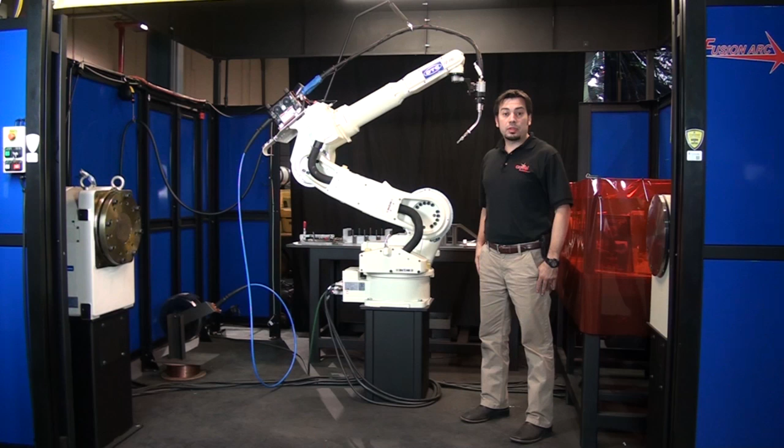Hello, I'm Bryan with Capital Robotics. What I'm standing inside today is a fusion arc weld cell that we can provide to you to reduce your weld costs. I wanted to go over a weld audit, which we call a weld cost analysis, that shows a return on investment. Let's go ahead and open the weld cost analysis.

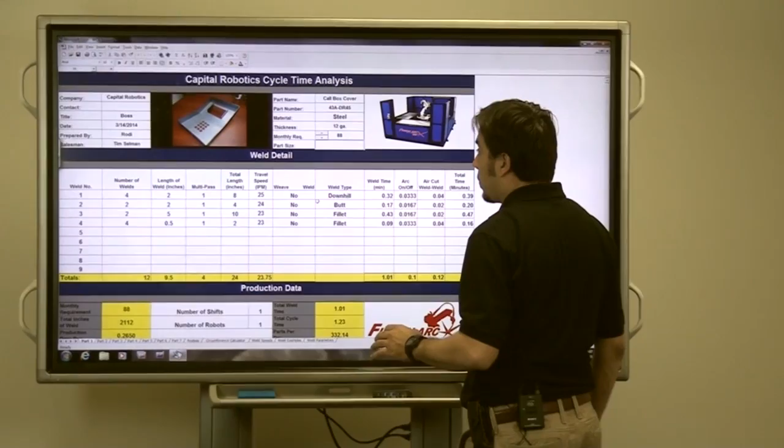So there's a couple different things for criteria we need here: what type of material are we going to be welding—steel, stainless, or aluminum—material thickness, different gauges, different thicknesses, plate, and then a monthly quantity.

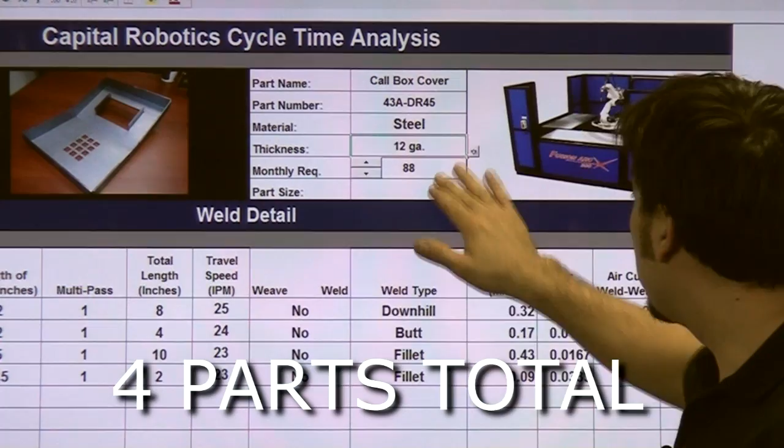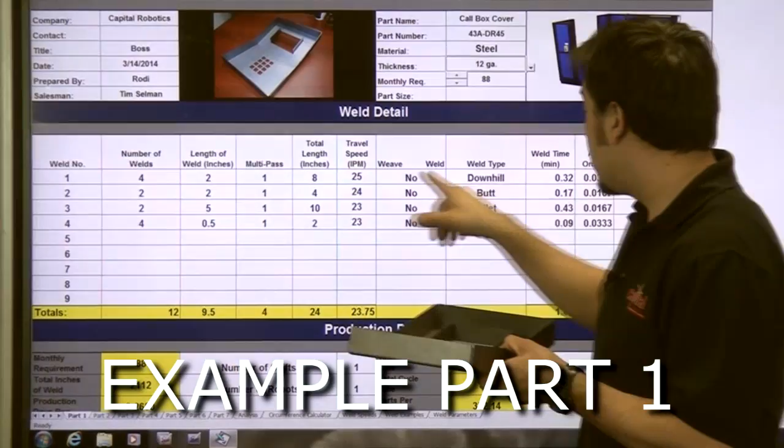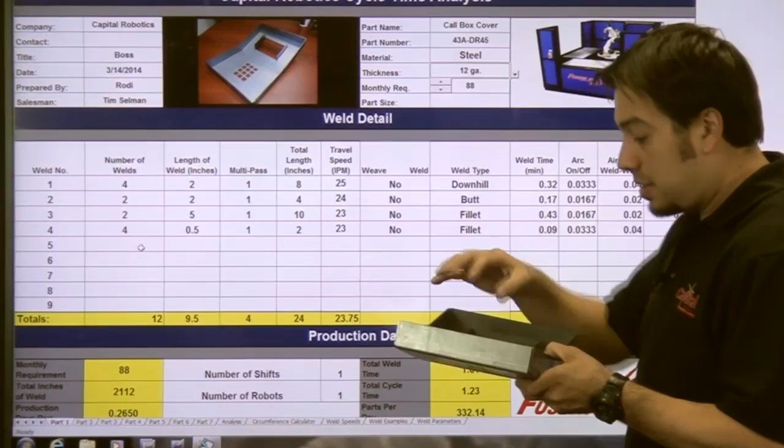So in this case, based upon the part we're showing here, we have a couple different welds with different measurements. We've got 4 vertical welds, 2 inches, as you can see, downhill—we're not going to be weaving it. 2 2-inch welds on the sides, these are butt welds illustrated here. 2 5-inch welds, which are fillets, on these tabs on the inside. And then 4 half-inch fillets on the inside of this portion here.

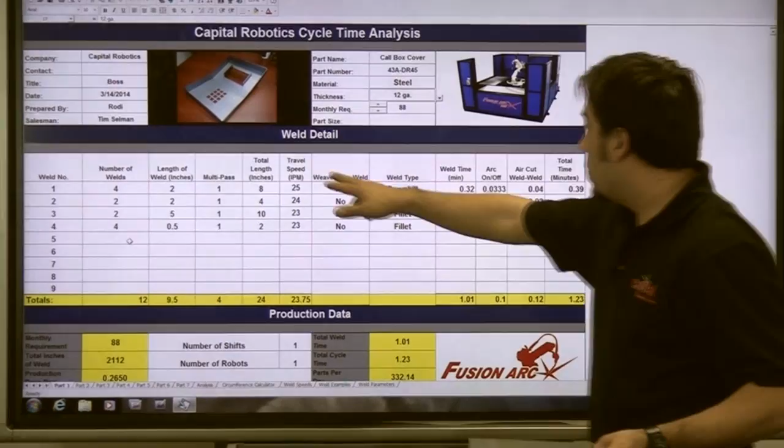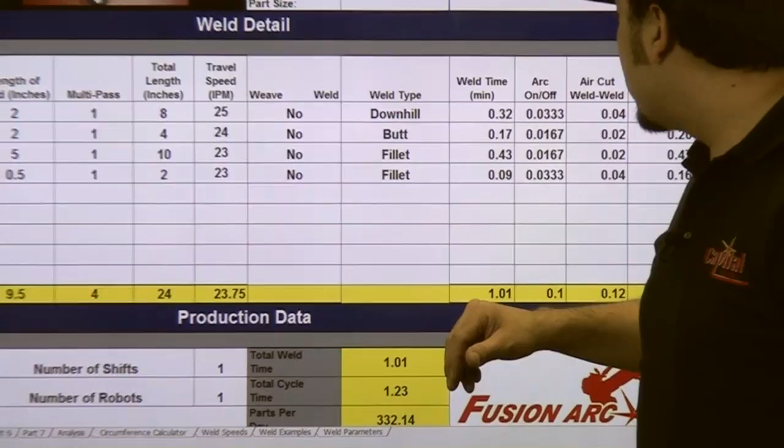So basically what it's showing is to do all that with the travel speed listed, it's going to be right over a minute of weld time, and the total cycle time is going to be about 1.25 minutes, so about 1 minute 15 seconds. So to do my quantity of 88 times per month, it's about 2,100 inches of weld. It's going to be about a quarter day to do that production.

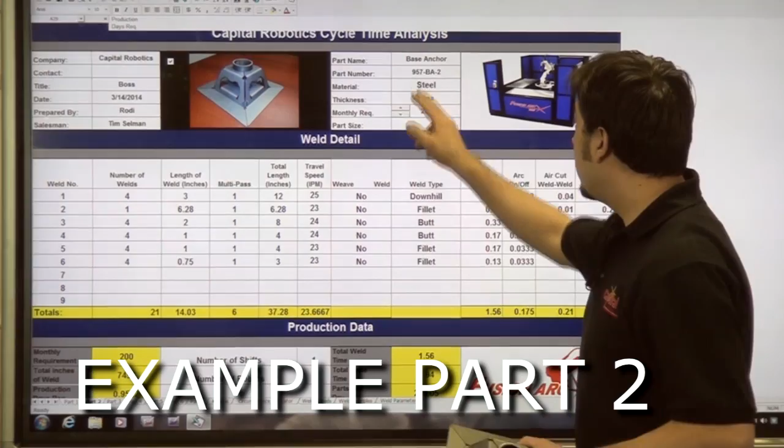So the next part we labeled the base anchor. Again, it's a steel part, 12 gauge. We're doing about 200 a month, which is only about 50 parts a week. In this part, we have 4 3-inch welds, and so on, 1 diameter, 2-inch diameter on top. Showing the weld speeds again, we're not weaving, and the different weld types as well.

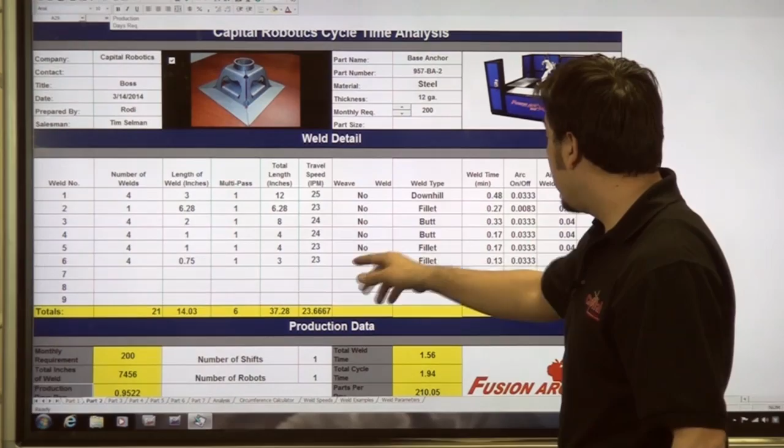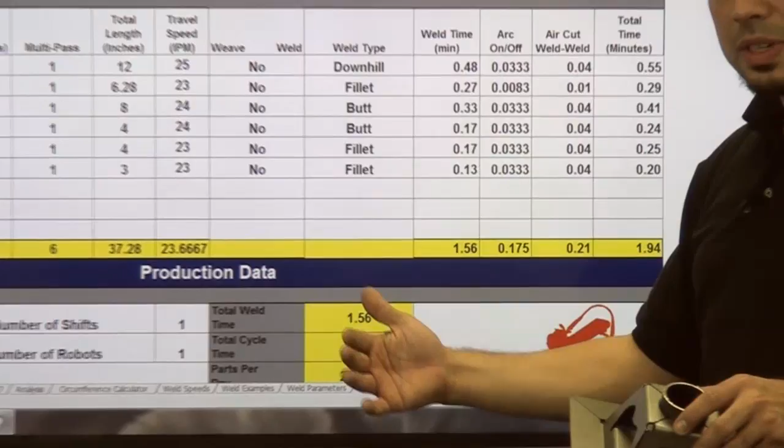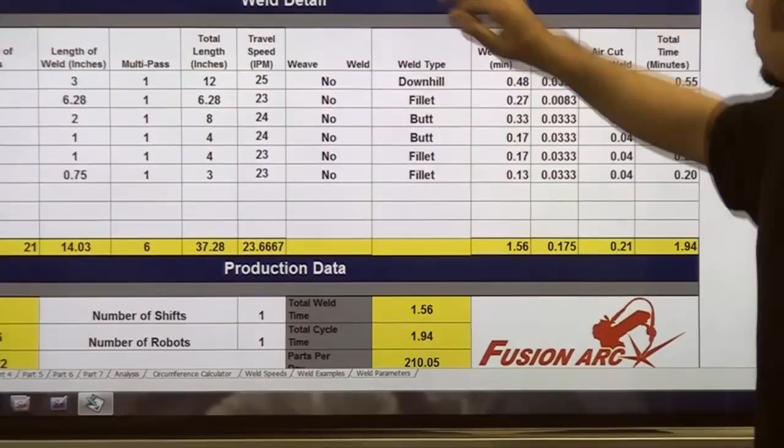Downhill fillet, butt welds. So to perform this part in the automated robotic process, it can be about 1.5 minutes of total weld time. But again, using cycle time analysis, it's going to calculate right under 2 minutes of movement—we're actually calculating the time from start to stop, the movement from starting to the next weld as well. So to do the monthly requirement of 200 a month, approximately 7,500 inches of weld, it can be about a day's worth of work. So a full month's production in 1 day.

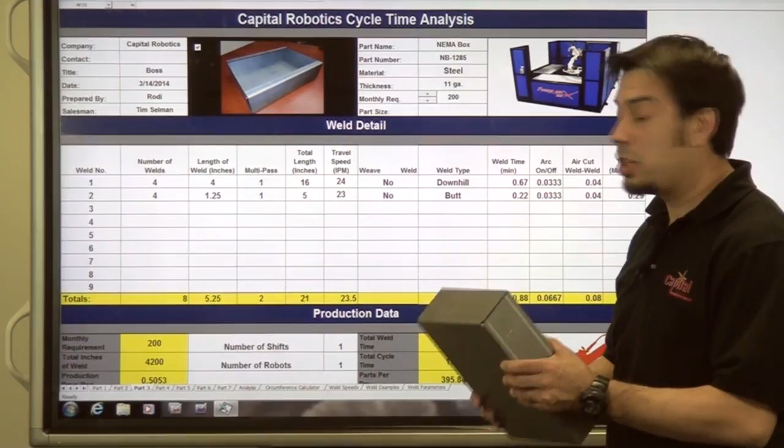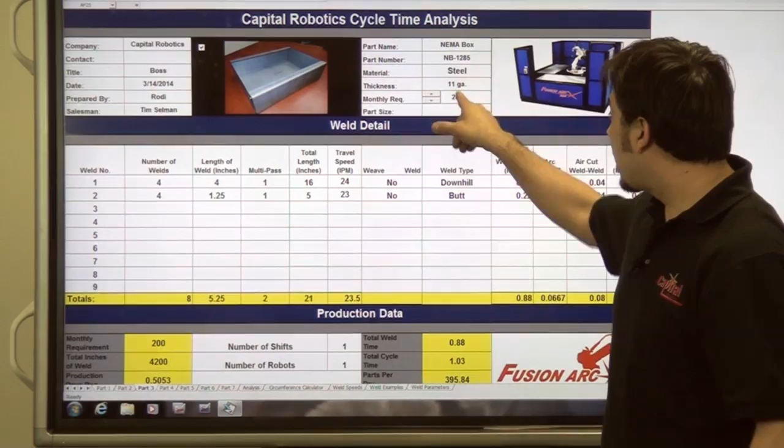That's powerful. So the third part we have is the NEMA box enclosure. A lot of our customers have different style boxes, fuel tanks, what have you. For construction of this, again we're looking at steel—in this case 11 gauge, a little bit heavier—200 a month. Basically we have 4 4-inch welds and 4 1.25-inch welds. So even though you'd think this doesn't have a whole lot of linear inches of weld, by the time you calculate 200 a month, it's about 4,200 inches of weld. So again, to do the monthly requirement here, we're looking at a half day of production.

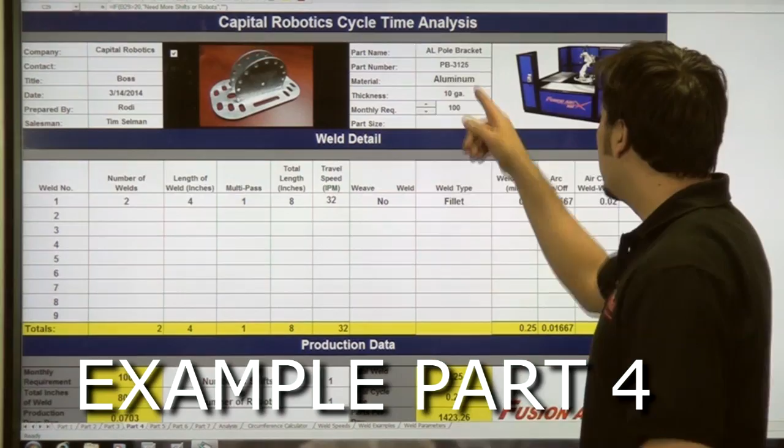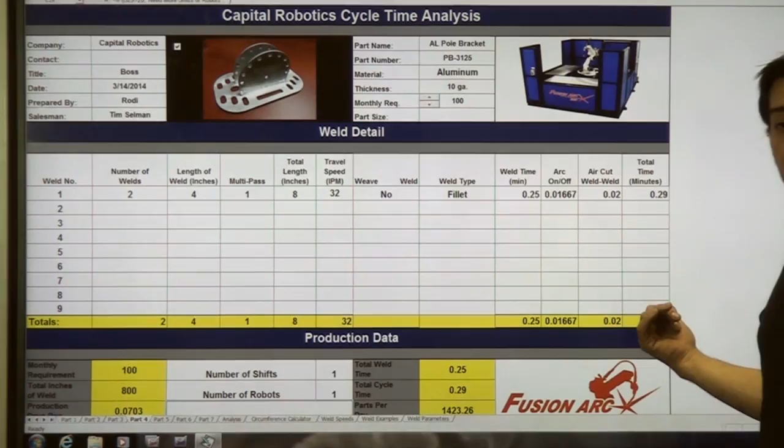So the last part of the analysis is the aluminum pole bracket, 1/8 inch thick aluminum material, doing about 100 a month, again about 25 a week. And again, not many welds on it, but still 2 4-inch welds. We're not weaving, fillet—it's going to be about 1/3 of a minute, so you're looking at right at 20 seconds. So to do 100 a month, it can be just under a couple hours to do that part.

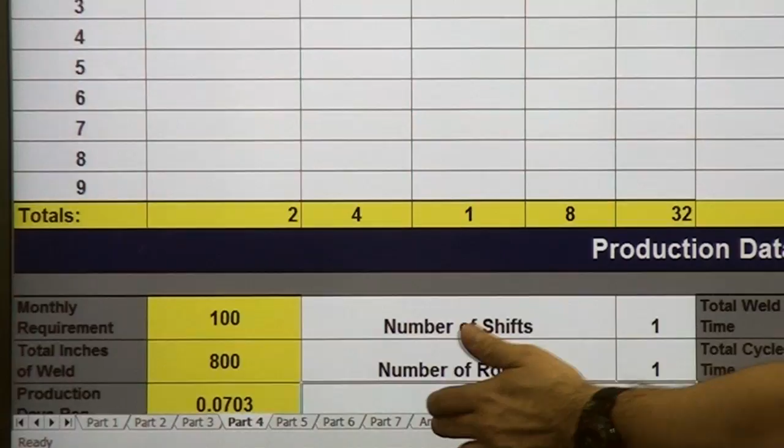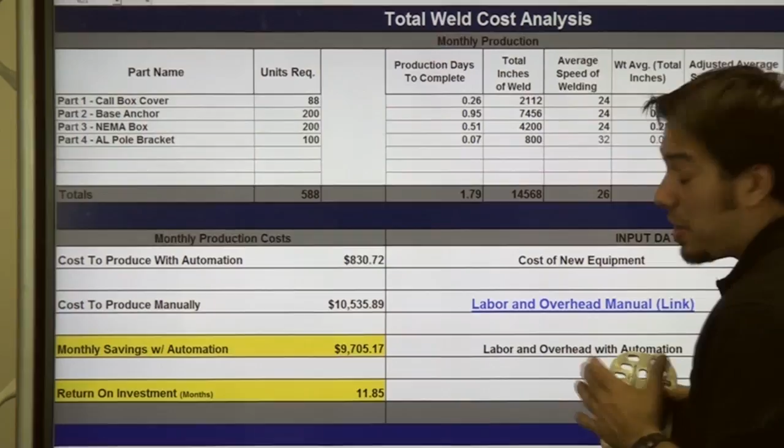So if we go now to the analysis tab, this is kind of where we can calculate the total number of parts and everything, units required. So although we only had very lower volumes for lot sizes, it's a number right under 600 parts a month. Production days to complete, under 2 days to complete it. Total inches of weld, you're right at 15,000 inches of weld.

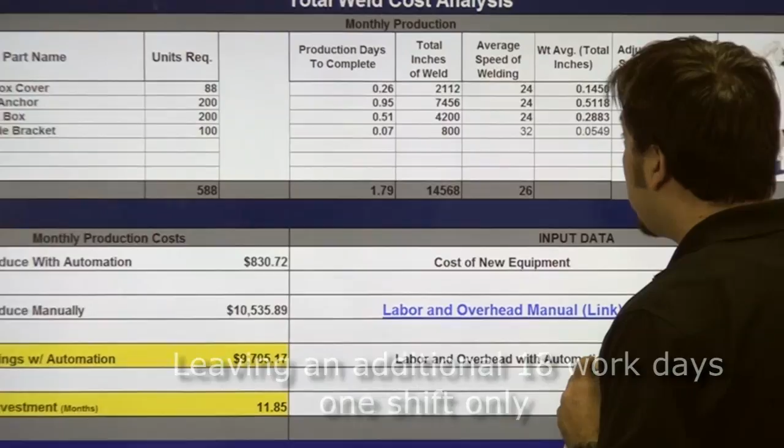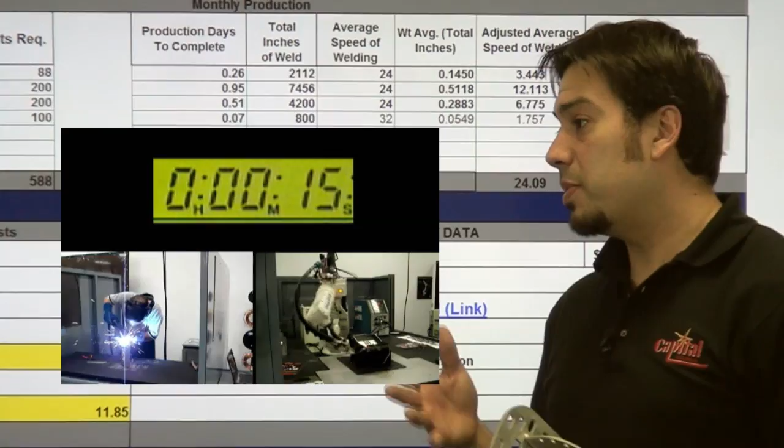So the way this spreadsheet calculates everything is based upon human efficiency and human speed of welding versus automated efficiency and automated speed of welding. So on the automated side, we're going to be about 80% efficient. That means out of a 10-hour shift, you're welding about 8 hours a day if you can feed the machine correctly. The human's going to be around 20%, 22% efficient. It's not that anybody's lazy—that's saying from moving from part to part, lifting up the hood, taking breaks, using the restroom, what have you.

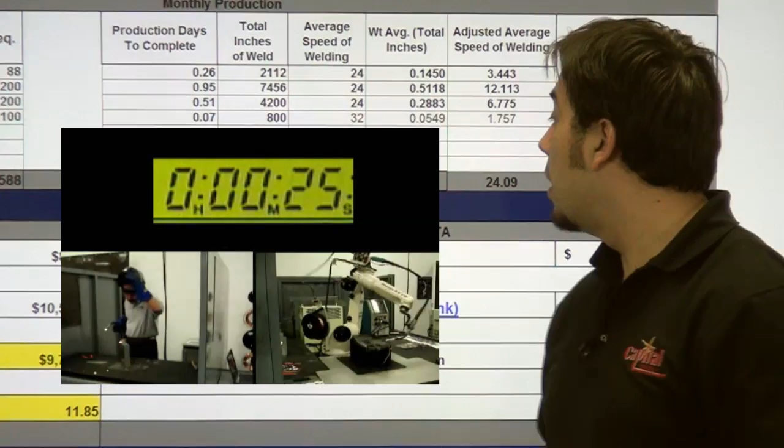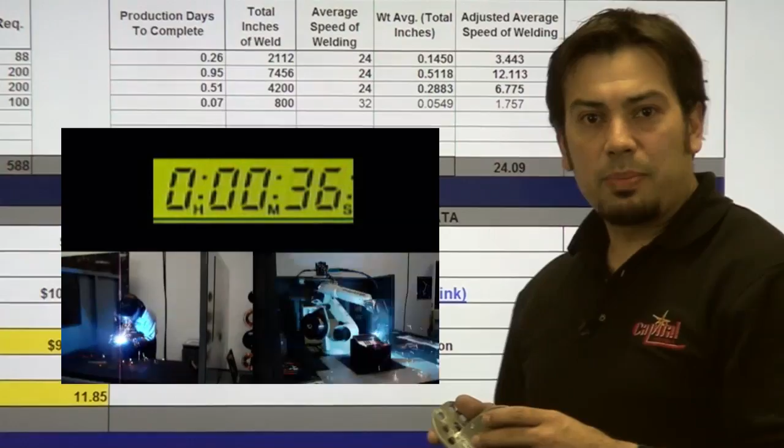So my average speed of welding can be about 26 in this case. This customer was TIG welding this part, so you're going to be running about 8 inches a minute on that part, and then on the MIG process about 8 to 10 inches a minute as well. So based upon that criteria, the burden rate is going to be about 60 bucks an hour.

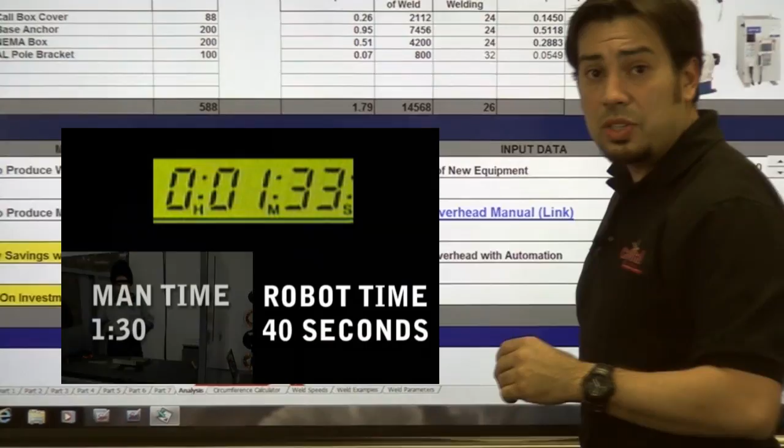So to perform 14,568 inches of weld manually, at the manual efficiency and manual speed, it's going to be about $10,000 per month. To do the same thing robotically with my efficiency and my speed, we're looking at $830 per month. So your monthly yield is going to be about 9,700 bucks. Total investment of $115,000—big thing here, ROI is less than 12 months.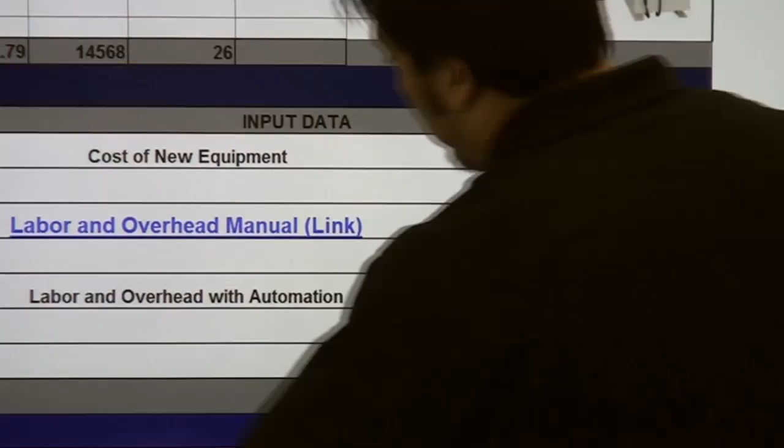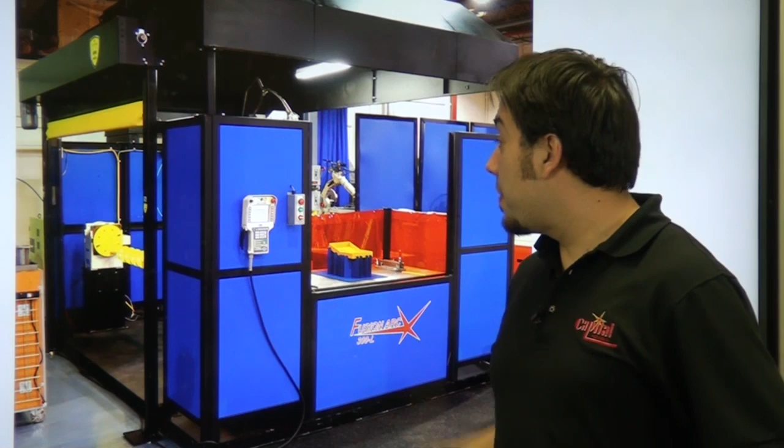So as you can see, justifying a fusion arc weld cell by Capital Robotics is very achievable, even with low lot sizes. We're only utilizing the robot 8 hours a day, 1 shift. As you can see before, there was only 2 days being used out of the work month, thus leaving 18 days to fill up the robot with even more product.